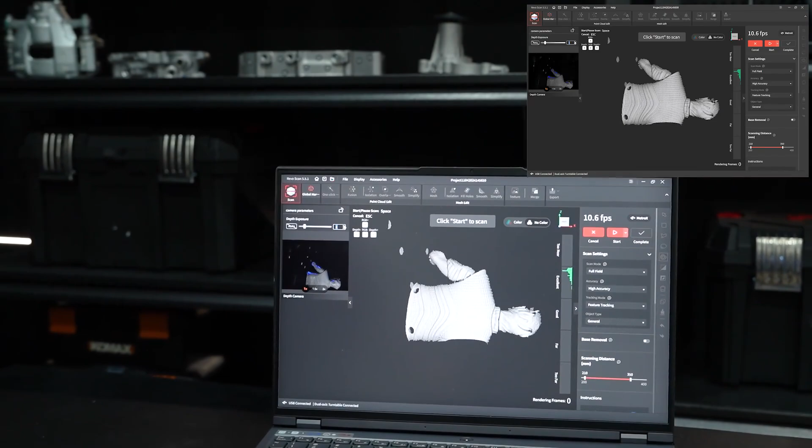So it tilts it, which is understandable because typically when we're using full field version, what's the case? We normally have the scanner in our hand and it's vertical. So that's an easy fix. Just hit this button right here and adjust the camera angle. And now you see it in the preview screen how we're actually seeing it. So perfect. So there we go.

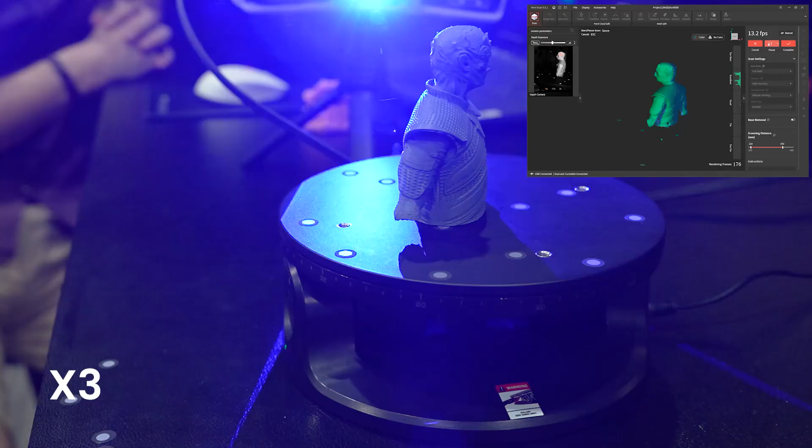Let's try, get your distance right of course. And now we're in full field mode. Adjust the exposure. Seems like 10 is a good choice. High accuracy, feature tracking. Start scanning. And we're just going to let it rotate once around. Pretty much there. Let me just pause it to make sure. Yeah, we got a full 360 of it. Great, so let's complete that.

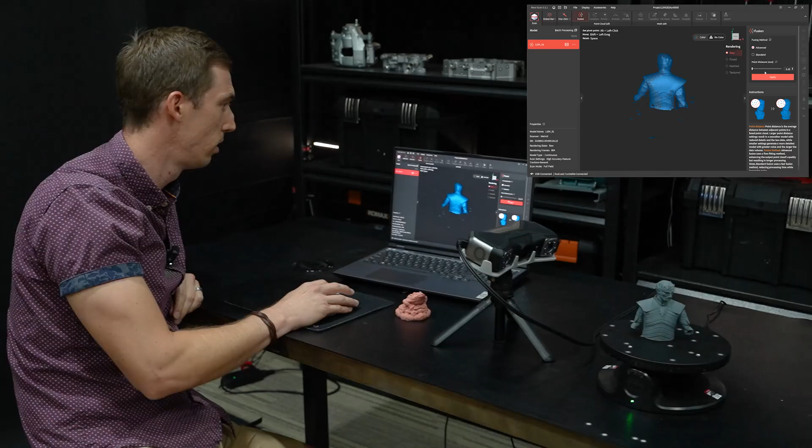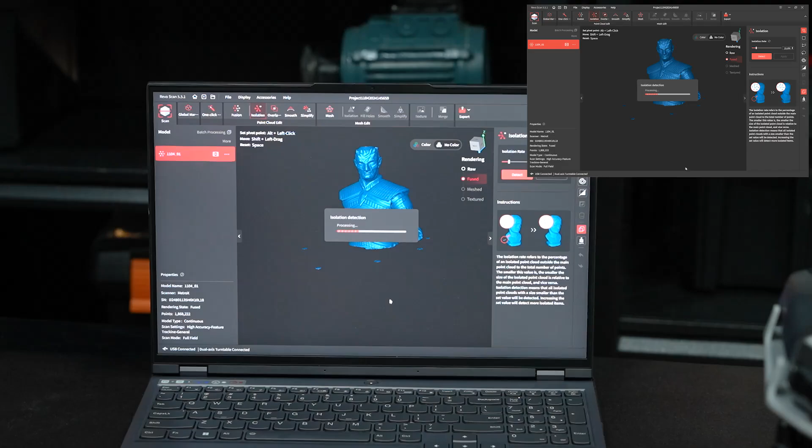Run it through Fusion. Make sure that your point distance is turned all the way down. That's just with fusing the point clouds. Honestly, looking really good. Let's clean it up a little bit, pick up the isolation. Apply, and then let's mesh it.

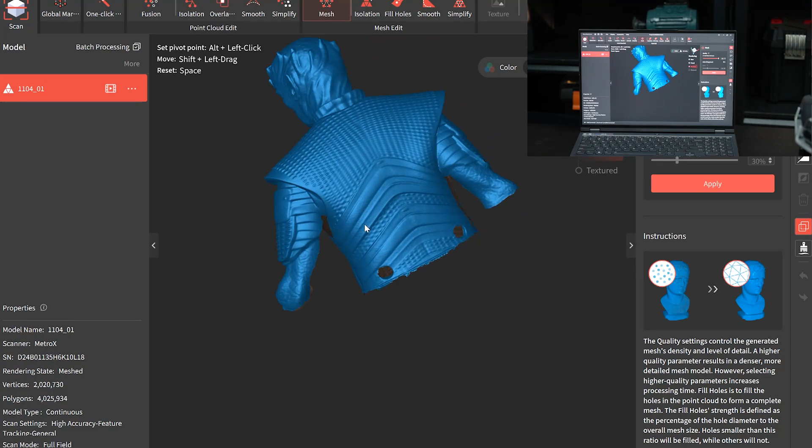Yeah, so there you have it. I mean, looks really nice. The detail of his armor picks up all the grooves quite well. The accuracy and detail is there. And again, this is using full field mode, but it's due to certain steps that made this possible.

Obviously, if I would have picked it up and used my hand and not used the turntable and just tried to rotate around here, most likely would not have gotten this result because it's adding human error into it. But we use the tripod and we're using the turntable and we turn the speed down and it gets a great result. So in the second part of the video, now I'm actually going to show you the other mode with auto turntable and we're going to scan this item and compare.

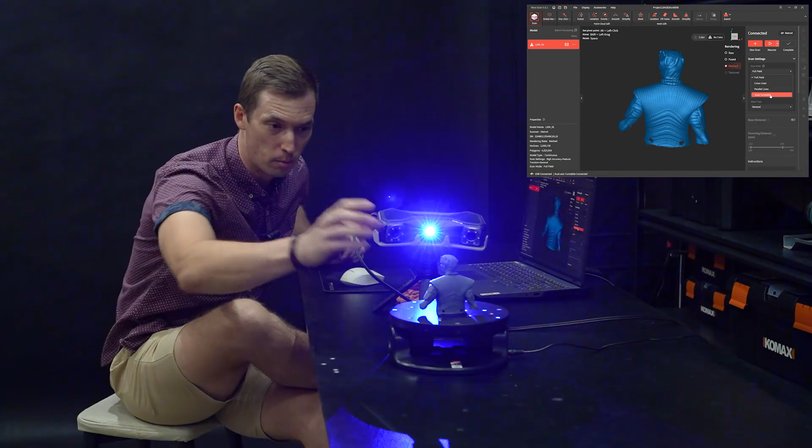Okay, so now we want to try out the other mode. We just did full field mode and now we're going to switch it to auto turntable. But in doing that, you want to make sure you put your sticky pad on the turntable itself because in using auto turntable mode, the angle is going to be adjusting on the dual axis turntable. So make sure your item is fastened securely. Select that auto turntable and we are going to do a new scan.

Give the software a moment, new scan. Adjust your exposure a little bit. Previously we did it at 10, seems like a good choice for this one as well. So now we just need to go into the settings under auto turntable mode and adjust this.

So when it comes to counterclockwise, clockwise, that doesn't matter too much. We can just keep it at counterclockwise. Rotation interval, so pretty much just the degree of how much you want the turntable to twist every single time when the scanner snaps the shot, about between 1 to 3 frames. We're keeping it for speed-wise 10.

So the first rotation, it's just going to be level, 0. For the second rotation, I'm going to adjust it. And make sure you click these for how many rotations you want to do. So I'm going to do a full 3 rotations. For the second one, let's turn it up to 20 degrees. So that's going to turn it 20 degrees one way. And then for the third rotation, let's turn it to negative 20 because that'll rotate it the other way, 20 degrees. And that should give us a good result.

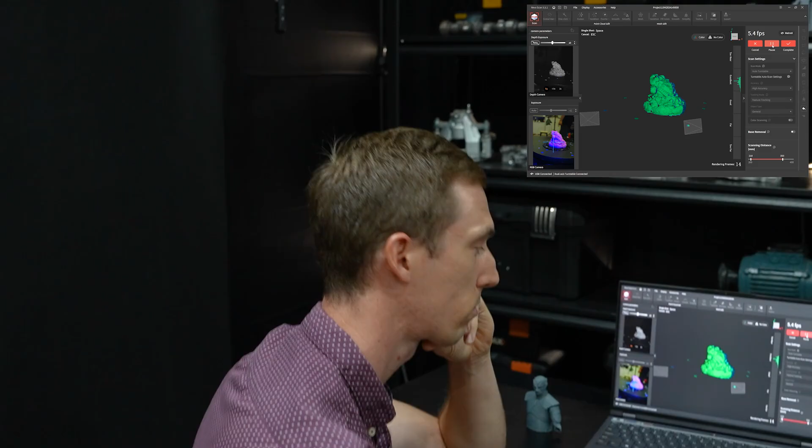So yeah, as you can see right now, it just turns a little bit. That's what we set in the settings. Turns 10 degrees, pauses, the scanner snaps a shot, captures about 1 to 3 frames. It's going to go all the way around, and then the scanner is going to pause again, and then it's going to tilt to that 20 degrees. Do the same process, then tilt back to 20 degrees the other direction.

And you might be wondering what these little squares are on the preview screen. You'll see it in the end, it'll make more sense later, but that's pretty much showing you where the scanner would be in relation to the model that you're scanning. It'll complete a really nice clear picture later that you'll be able to understand more easily.

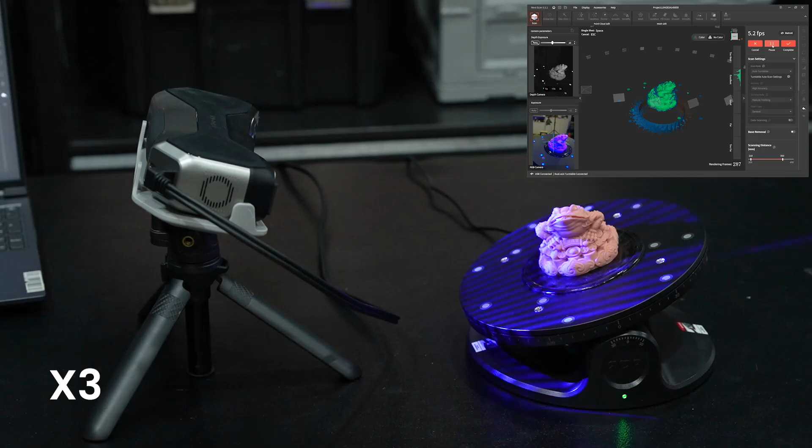Flat, 3 rotations. Captured it really nice and full. Let's complete this. Oh, let me just zoom this out first for you to see what I was talking about with all those little squares. So again, the squares represent where every time the turntable stopped and the scanner snapped a shot. So you can just kind of imagine the scanner in all these different spots getting the angles of the toad. All right, let's complete it now.

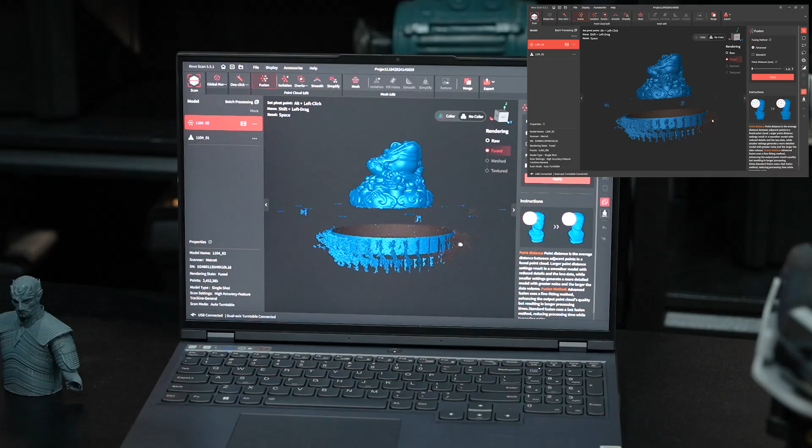Yeah, it's cool when you zoom it out. All right, run it through Fusion. And again, advanced, point distance all the way down. So we're already seeing, wow, looking at the details on that just after fusing the point clouds. Really looking good. Let's move to some isolation though and detect that, clean it up some.

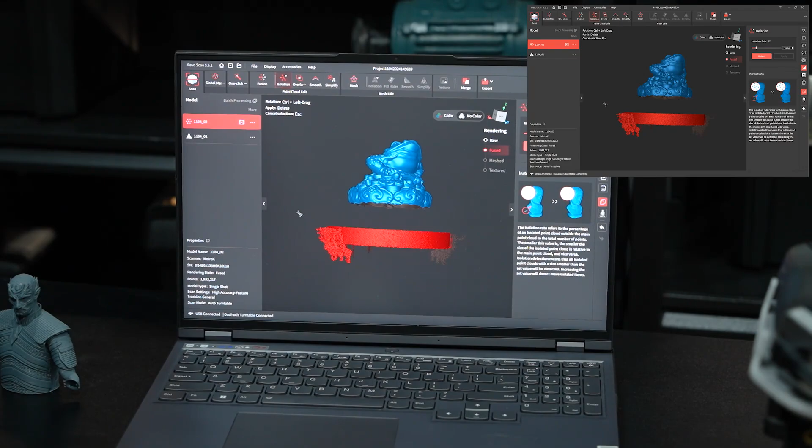We can also use our tools on the side here to delete this. Because I adjusted the angle of the turntable to 20 degrees on that one side, it captured some of the bottom of the turntable. Here we go, this is a better way to do it. Delete. Beautiful. All right, moving on to mesh.

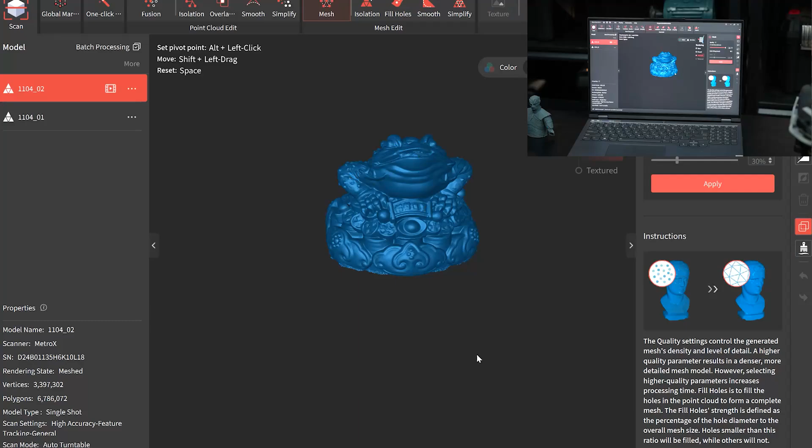So there we have the result of our Chinese toad. Look at the details on this, on his back.

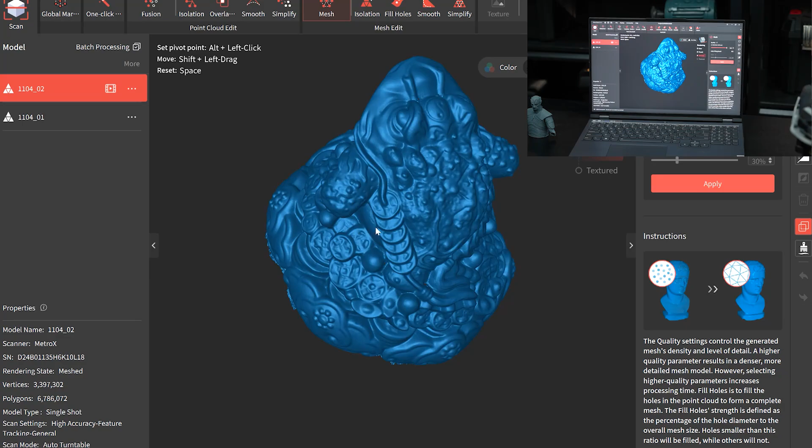See all the warts on the toad's back, these coins and the details it's bringing up. And again, this is the auto turntable mode. So I mentioned earlier we were going to compare the two modes, but really what would be best, let's do a comparison now of this and then continue using auto turntable mode, but just switch the modes to full field mode. So right now, you see the result. That's auto turntable mode. Let's do another scan and try with full field mode.

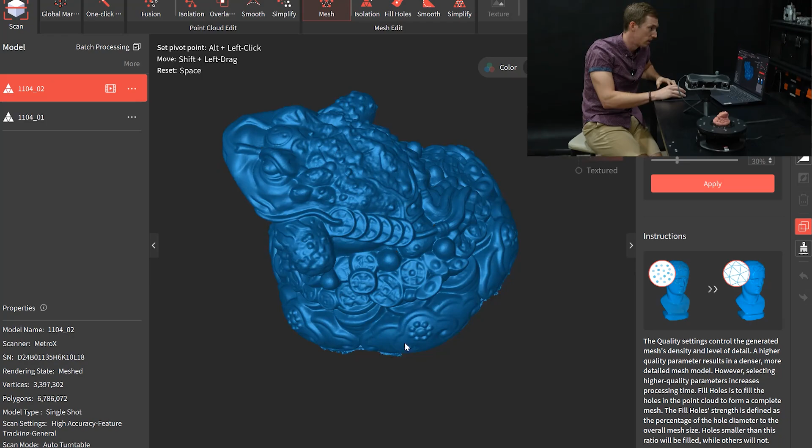Okay, so as I mentioned, we have our two scans, full field mode, auto turntable, but what's not fair in comparing the two is that they're two different models. So now we're going to do another scan of the toad itself in full field mode. So keeping them on there, let's do a new scan and change the mode to full field mode, and then we can accurately compare the two. So again, let's switch it over, full field.

And again, it's twisted, so just make sure you correct that, and you can recenter it. Adjust the exposure, keep it at the same, 10, looks pretty good. And we already have all the settings. Now on here, just make sure in the settings that the speed is still turned all the way down, which it is on the dual axis turntable. Full field, high accuracy, feature tracking, general object, rock and roll.

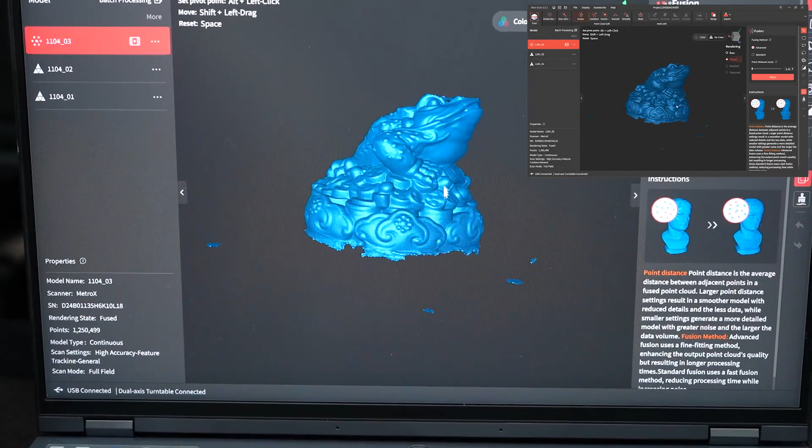Pause it. Yes, we got all the way around there. Great. Let's complete it. Do some fusion. Make sure again, point distance is the same. Looking pretty nice. But that's one thing, you can see why it's better to use auto turntable, because there's some spacing there without the turntable actually changing the angle. You get some holes, but that's okay. Let's clean up the isolation, detect it.

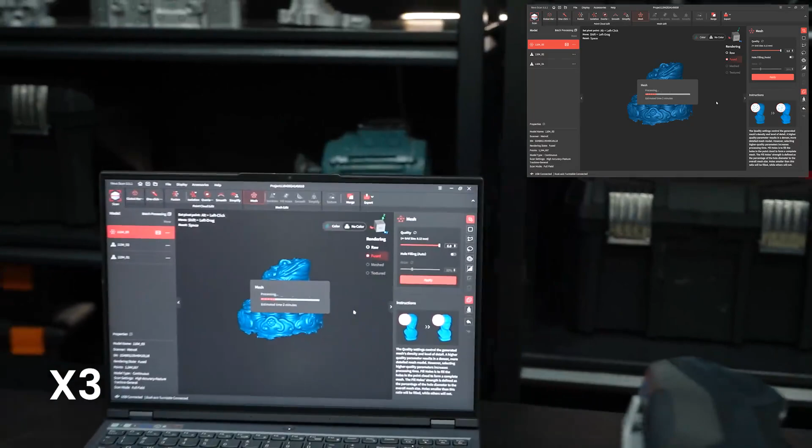Okay, so there you have it, full field mode. I mean, it looks pretty nice, but let's pull up the auto turntable mode result of the toad, and you can look at both of them on the screen. Check it out.

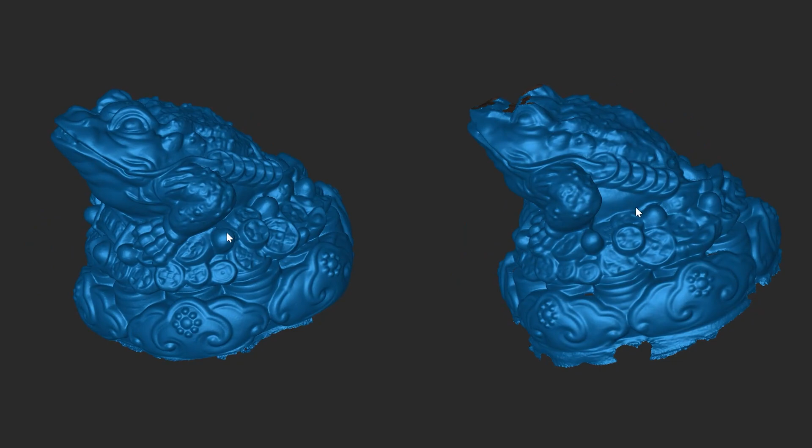So for our next challenge for MetroX, some of you in your comments have mentioned that in using auto turntable, possibly you can't get something that's under 10 millimeters in size. So we have a good example here of a dime, half dollar. The dime is definitely under 10 millimeters. So we're going to put these both on the turntable itself, and we're going to scan them and see how the results are in picking up the dime. But of course, because they are shiny, make sure you put some scan spray on them.

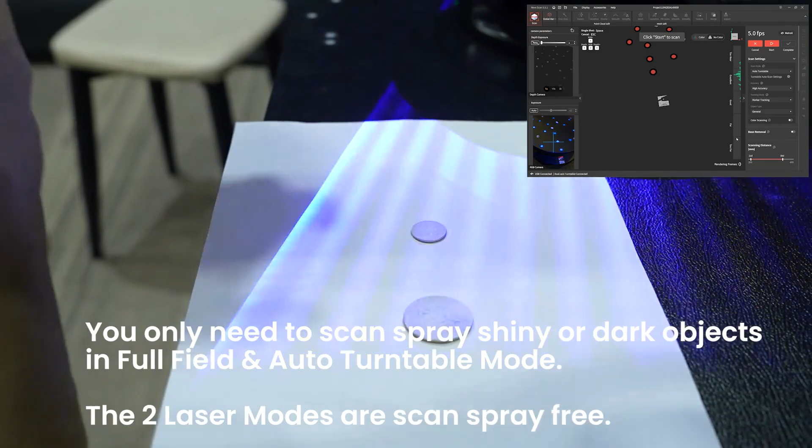You gotta kind of just get it just right. Not too much, not too little. Let it dry a little bit. And when picking it up, of course, make sure that you grab it from the side. You don't want to right away rub off what you just sprayed on there. And we have the glue tack already on the turntable itself, and we're not going to be covering up any of the marker dots. Place them on there. And you want them in the center. All right, let's try it out.

So for settings, I just want to show this to you. We have it right now, rotation interval. When we just did the toad, it was at 10. It was turning 10 degrees every rotation. Now we adjusted that to 5. It's just turning 5 degrees. The speed is still the same, but we're just going to be doing one rotation, and it's going to be turning 30 degrees this way. And with that, we should be able to get an excellent result. Exposure set at 1. Again, auto turntable, high accuracy, marker tracking. Let's give it a try.

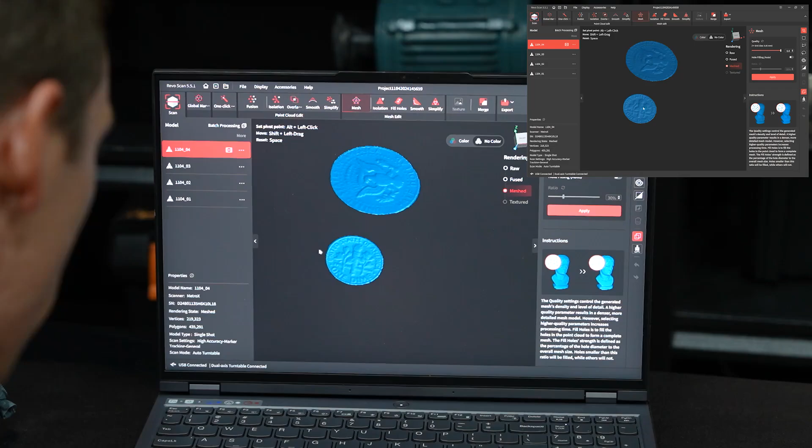And the drum roll, here we go. So there you go. There's that dime. Can even see the lettering. Looks really nice. But this is a fun little trick. If you go to display, and you go down to model properties, this is kind of cool. So right now it's default, it's already set to this blue color and glossy. Let's switch it to metallic, apply, and then you really can make out everything on there. Like you can actually see the lettering, United States of America, one dime.

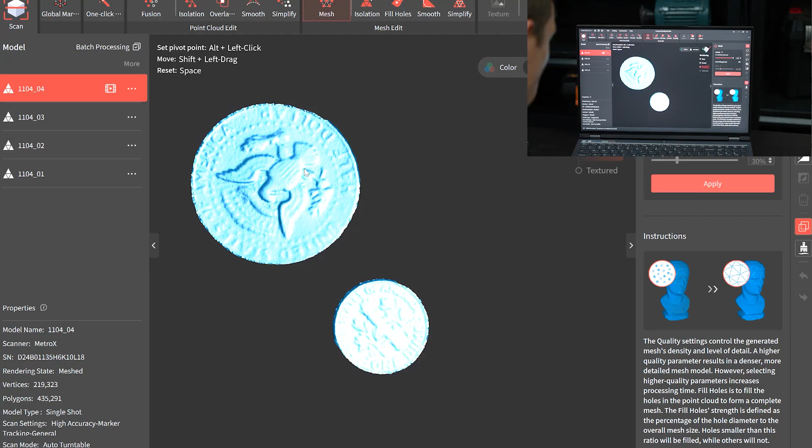And of course the half dollar came out just fine. So impressive. So it can be done. For those of you who are concerned, 10 millimeters and under, no problem at all for MetroX.